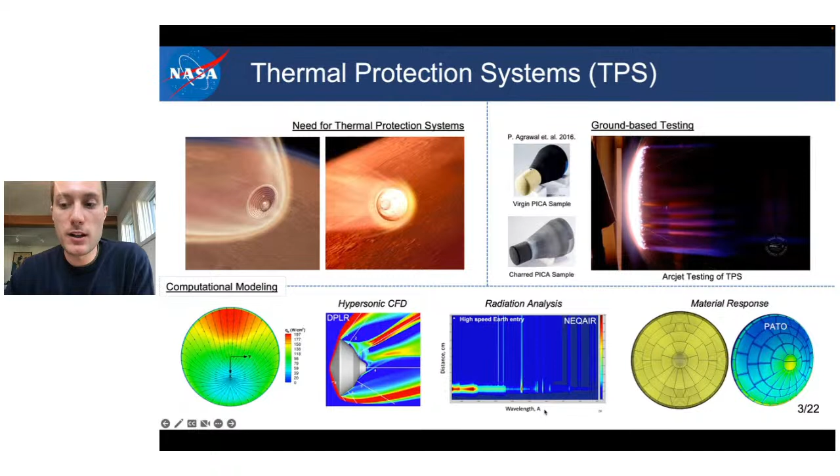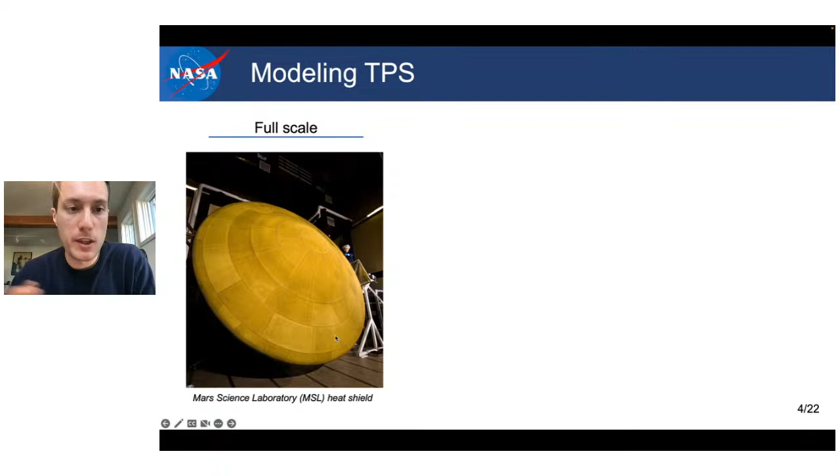So my group, specifically the PMM group, looks at this type of modeling, and we tackle it by employing a multi-scale approach. We have software that can mimic the response at the full scale of the heat shield, with meshes and models that mimic the whole surface of these big heat shields, which can be meters in size. However, in order to capture all the complex physics that happens in depth in these materials, we need to look also at the microscale side of this modeling effort, because we need to compute the material properties at the microscale in order to feed them back into the full-scale models.

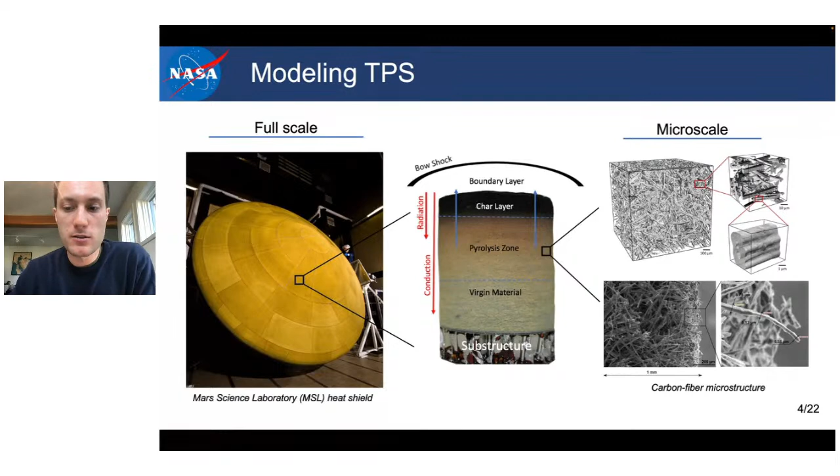There have been a lot of software that can do the full scale and material response sides, including some of the NASA tools like PATO, Fiat, Char, Icarus. However, Puma, which is the software I've been working on, is unique in the sense that it's one of the only ones that really looks into the microscale and computes and characterizes the properties at this scale.

And the materials that we deal with at NASA for the heat shields, as TPS, some examples are shown in this slide. They're mostly made of carbon fibers, and they're usually also infused with a phenolic phase. Phenolic is basically a resin that as it pyrolyzes, it absorbs a lot of energy, which helps the surface of the heat shield never reach the very, very high temperatures.

But there are multiple different architectures that these fibers can be arranged with. One of the most typical is called PICA, or phenolic impregnated carbon ablator, shown in the middle, which is basically just randomly oriented fibers. However, more recently, NASA has been investigating arranging these fibers into woven or weave components, by weaving them together like a yarn, as if it was a fabric. You can actually tailor the material properties to be more performing in a specific direction or in a specific environment.

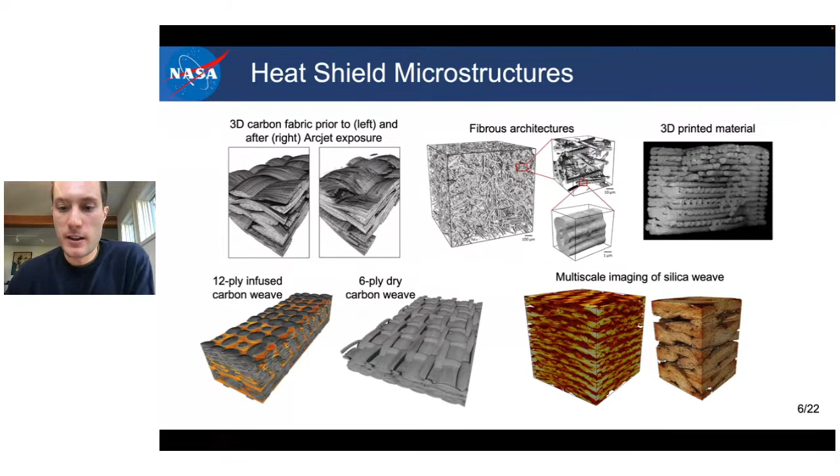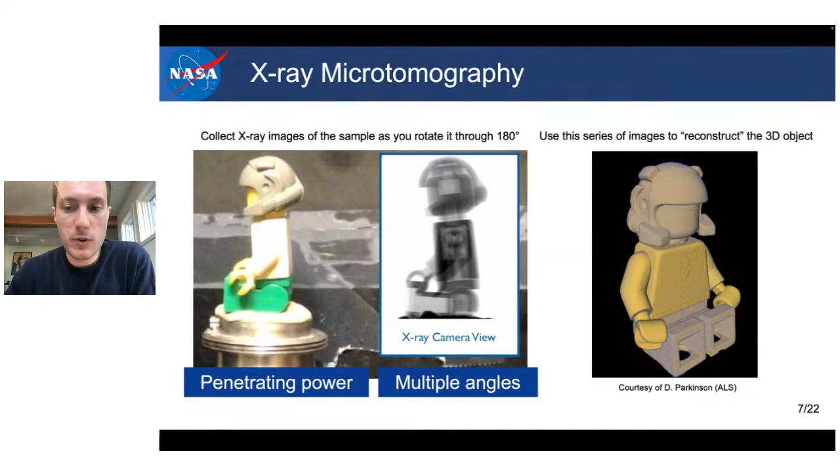So jumping into how do we get these microstructures into a computer, virtually, digitally. We use a technique called X-ray microtomography, which scans a sample, subjects it to very high intensity X-ray, and then you take scans at multiple angles. There are techniques called tomographic reconstructions, which enable you to obtain a 3D reconstruction of your model, including the internal structure, as you can see for this Lego man.

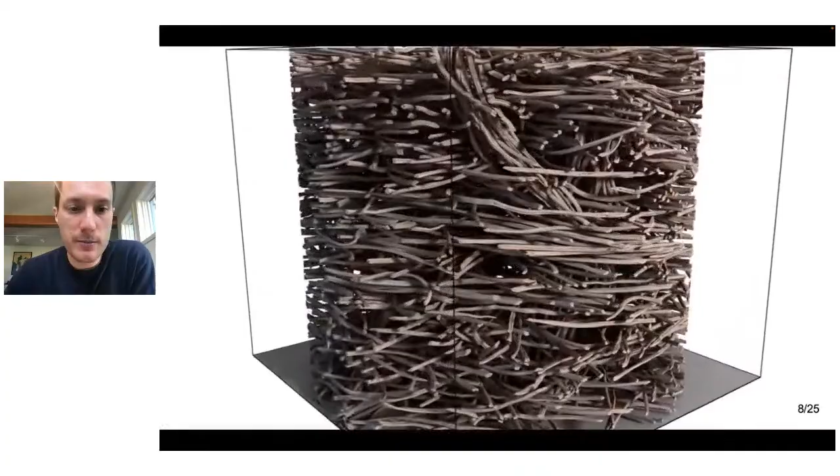So how does an X-ray microtomography of a TPS look? It looks as shown in this case, where you can see all the way down to the micron scale. Just to give you a sense, the diameter of one of these fibers is around 8 to 10 microns, and you can even see down to the hollowed out holes inside the fibers. So this is actually a sub-micron tomographic reconstruction.

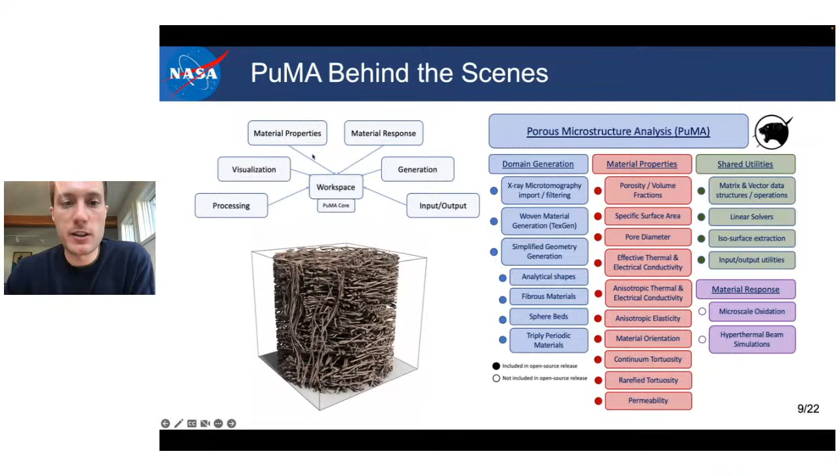So what Puma does behind the scenes, how Puma operates, is it leverages a class called the workspace, which is at the core of every operation that happens on these tomographic samples. This workspace class holds the 3D geometry, and then there are multiple classes that we've implemented as we were building the software to process the 3D domain, which is made of voxels, or 3D pixels. We've also recently added a lot of visualization capabilities to the software, but really the core and most important part of the software lies in the material properties and material response computation.

As I mentioned earlier, a few months ago we open sourced the software, and we've made it as user-friendly as possible. It can currently be installed using just a single line command, conda install Puma. We've also added a lot of documentation and tutorials for new users, and this has boosted our audience, and anyone joining today, I encourage them to try it themselves.

Just to give an overview of how the software is arranged, Puma used to be implemented only in C++ years ago, and that heritage part is still present in the current release.

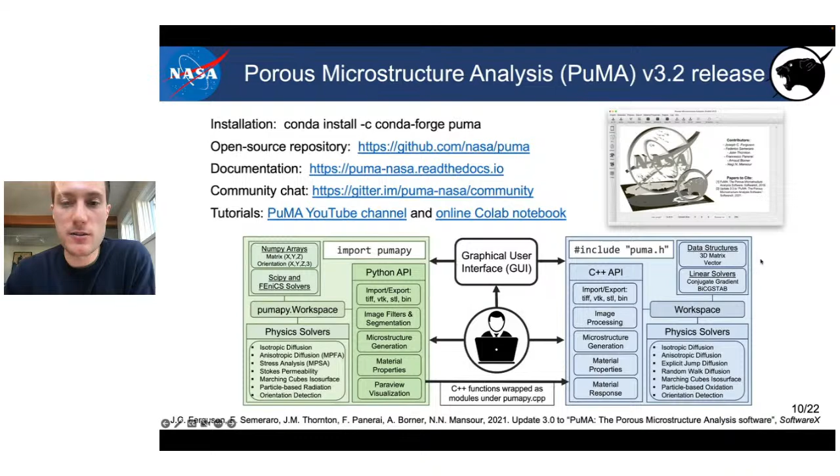More recently we've implemented a Python package, which also calls some of the C++ routines, and we call this package PumaPy. And for whoever doesn't want to write lines of code, you can use the GUI, or graphical user interface, shown here on the top right, which still gives access to a lot of the software's capabilities.

To show a few other snapshots of the GUI, here we are importing a 3D weave from an actual real sample from tomography, showing a 3D visualization, and finally doing some post-processing including the weave segmentation of the tows, as well as detection of the orientation of the tows.

More recently, Puma has also been packaged up as a plugin for a software called Dragonfly, which gives us even more visibility into the material science field.

Finally, I wanted to mention that we've recently been awarded NASA Software of the Year. I received the news just a couple of months ago, so we're really honored to have been awarded this prize for our efforts.

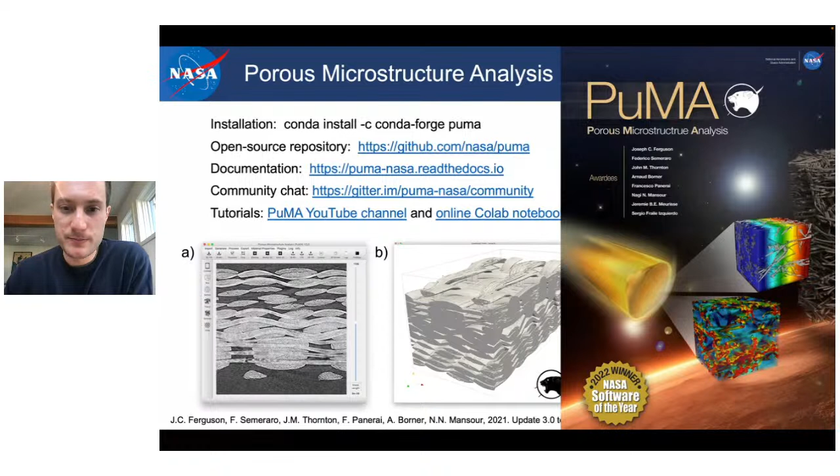From now on, I'll jump into more of the capabilities of the software. A big component are the particle methods implemented in Puma. What these particle methods do is basically a Monte Carlo type of approach, where you scatter particles throughout your domain and compute different properties and do different things.

One of the things the particle method allows you to do is mimic oxidation. Here I'm showing side by side a sample of fiber form, which is basically just the fiber phase of PICA. On the right-hand side is a 4D tomography, meaning we actually have a data set of a 3D model changing in time.

On the left is a similar domain in Puma, and we can mimic the same type of oxidation of the surface by tweaking the sticking probability of particles hitting the surface of the model. Again, on the left is a Puma simulation, and on the right is an actual real domain oxidizing on the surface. We can also compute the radiative conductivity.

The radiative conductivity is very important for high temperatures. We do this by scattering a whole bunch of particles from different spots, then tracking how far these particles travel until they hit the solid surface. You can then do statistics on how far a particle is likely to travel, and from that estimate compute what's called the extinction coefficient, which gives you the radiative conductivity.

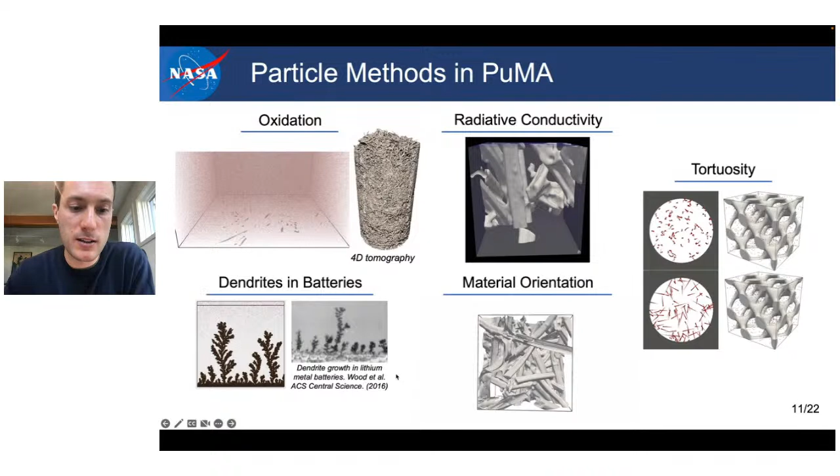The software has grown a lot in capabilities, and we've recently added a module to generate artificial microstructures. These are some examples of the microstructures we can create — we can scatter spheres throughout the domain, create periodic foams, as well as fiber structures, which are of course more relevant to NASA.

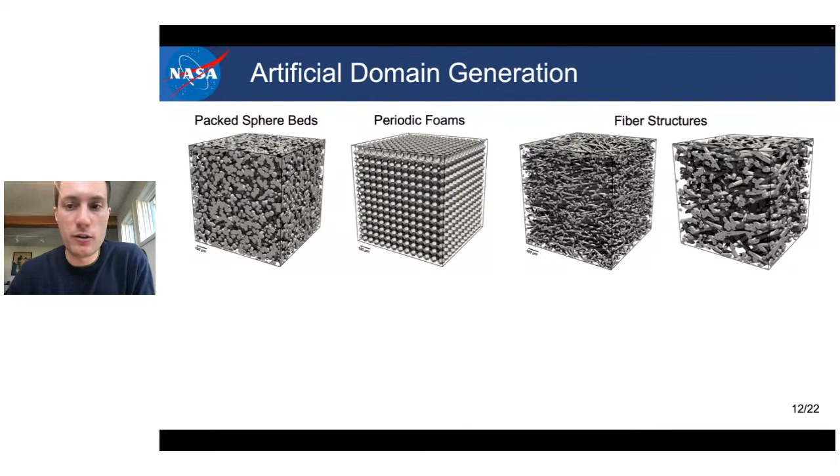For more of a combustion type of research, it's really interesting to look at triply periodic minimal surface type microstructures. And finally, of even more interest to NASA are the woven geometries — we also added a capability of generating an artificial weave from a woven diagram.

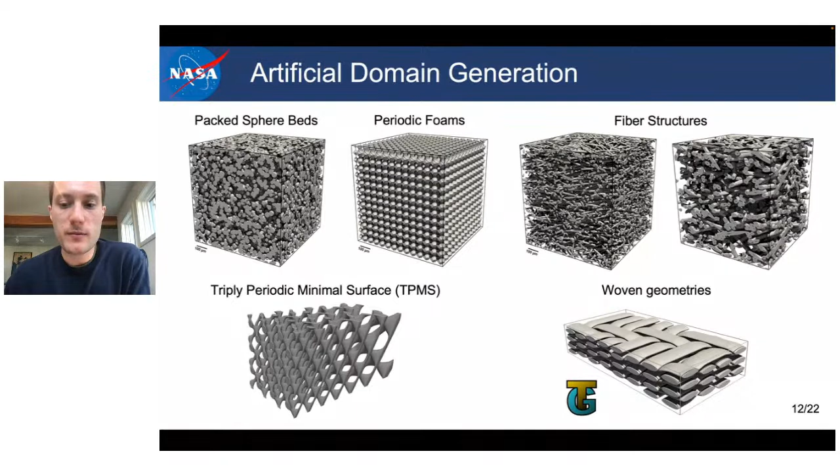From here on, I'll jump into the capabilities, the property computation side that I've implemented. But I wanted to add this slide to introduce the topic of anisotropy, and this anisotropy being carried out at multiple scales.

This can be explained by looking at a real tomography weave, shown here. As you can see, the tows have a very directional pattern. This directional pattern influences, of course, the properties, meaning that the properties in the warp direction are different than the weft direction and through thickness.

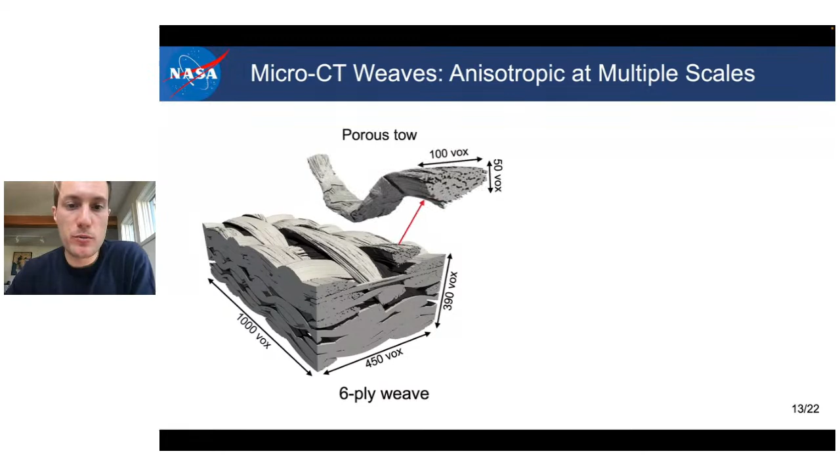If we zoom into a subsample tow, we can see that there is porosity going throughout the tows, and this porosity also varies inside the tow, which also affects the local properties and the anisotropy of these materials.

Actually, through research of ours, we've recently discovered that we can track this anisotropy all the way down to the fiber level, and these fibers are basically made of cylindrical graphene sheets, so along the fibers there will be a lot higher conductivity, for example, than across it.

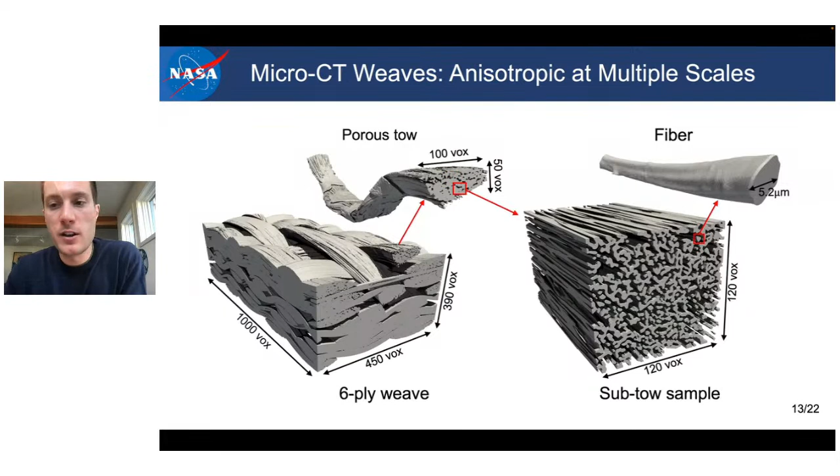We researched this behavior, and we could see that it matched experiments we could make, only by imposing this different fiber conductivity.

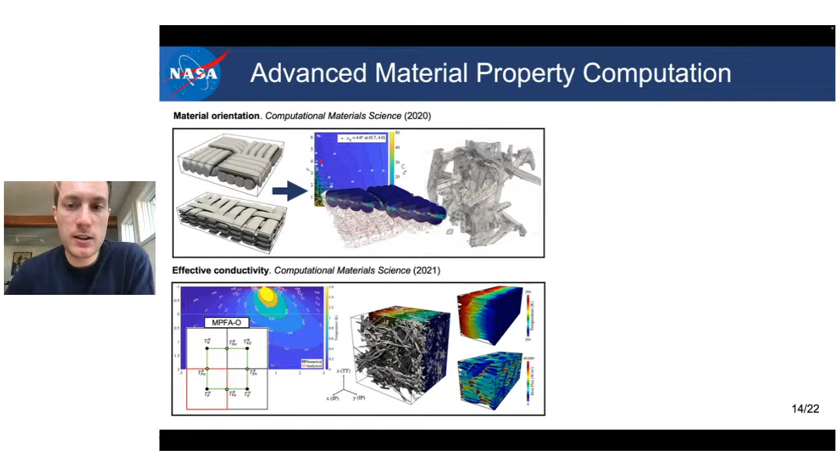At a high level, the next few slides are about material orientation, which is critical for considering this anisotropy inside the materials. Then I'll introduce the conductivity numerical method that allowed us to compute the conductivity, including considering anisotropic phases. Similarly, here are some snapshots of the verification campaign that we did for the elasticity.

The elasticity actually uses a very similar numerical method, but generalized to vectors instead of scalars for temperatures. So we extended temperatures to displacements.

Finally, through the collaboration with UFF, we have added the effective permeability to PUMA. We use a different numerical method for this, based on finite elements instead of finite volume, but we still optimized it as much as we could for these voxel meshes that we're getting from tomography.

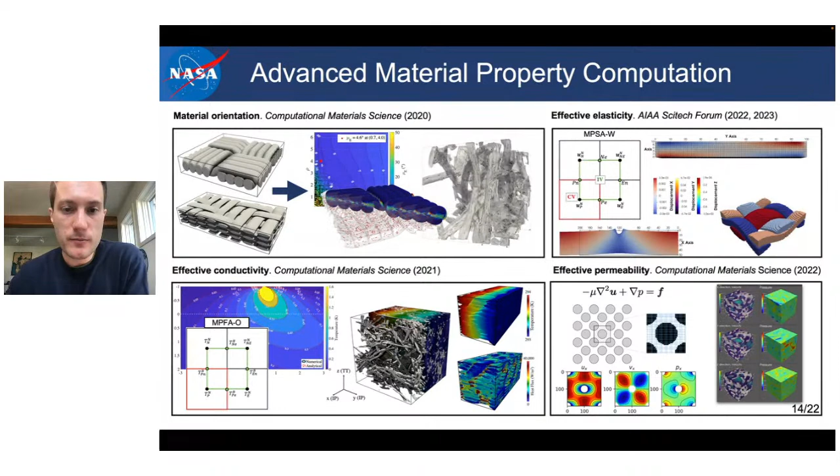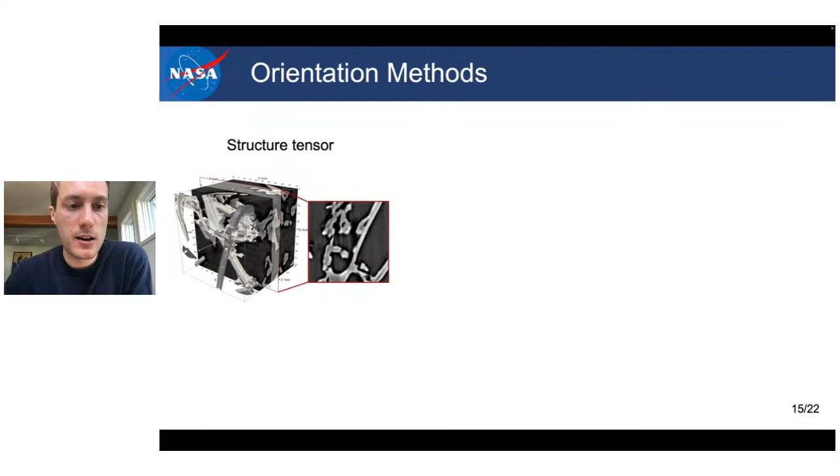Starting from the orientation methods, there are 3 different functions that we've implemented. The first one is what we call the structure tensor, based on an image processing technique called the structure tensor, which looks directly at the grayscale values of your tomographic domains.

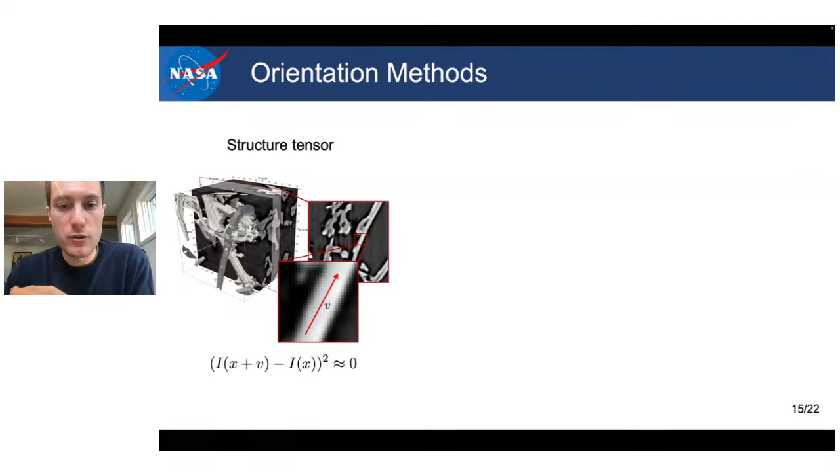It picks out, by applying different Gaussian blurs and derivative of Gaussian filters, and doing an eigenvalue analysis on these filters, the direction along which the gradient of these grayscales changes the least. This turns out to be a very good estimate of the local orientation of our fibers.

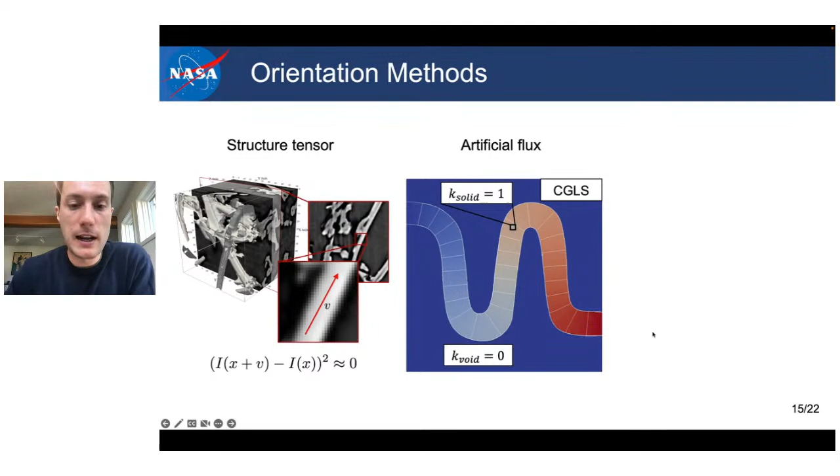Similarly, we also implement an orientation method using the conductivity solver, basically by imposing an artificial conductivity of 0 to the void phase and of 1 to the solid phase. We run conductivity simulations in a specific direction, and the heat fluxes that are generated, shown at the end of the simulation after the solver has converged, are going to be roughly aligned with the local orientation of the material as well.

And then finally, this is the raycasting, which uses the particle method that I mentioned earlier, where you track the longest traveling particle and pick that to be your local approximate orientation.

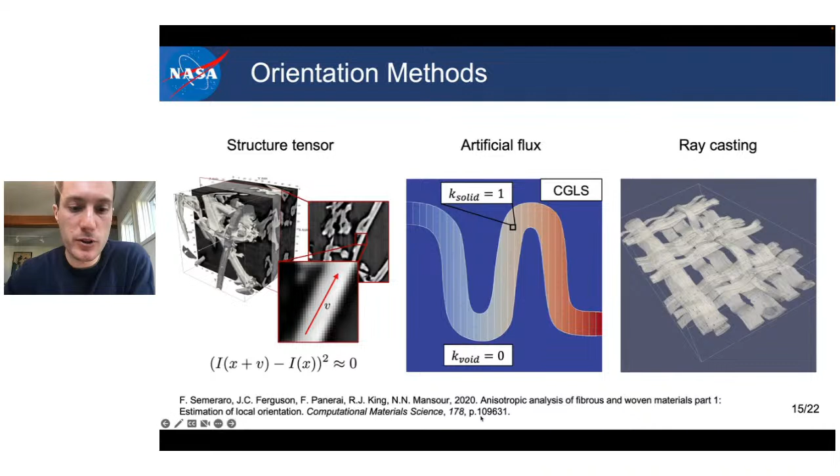We've wrapped up this work into a part 1 paper to Computational Materials Science. The part 2 was about the conductivity, which uses the local orientation of these phases.

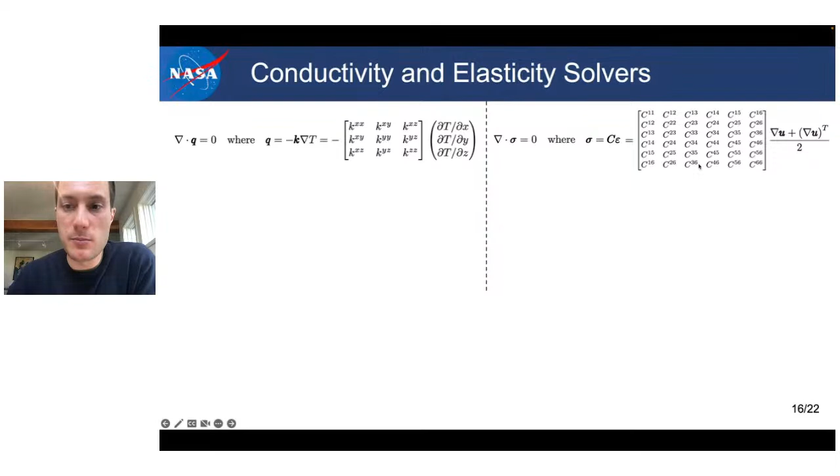What we are using for the local discretization of our finite volume scheme is called the multi-point flux approximation, or MPFA, a commonly used numerical method. This linearly approximates the fluxes to the local nodal temperatures through a transmissibility matrix. On the right-hand side is the multi-point stress approximation, which does the same between stresses and nodal displacements through a transmissibility matrix.

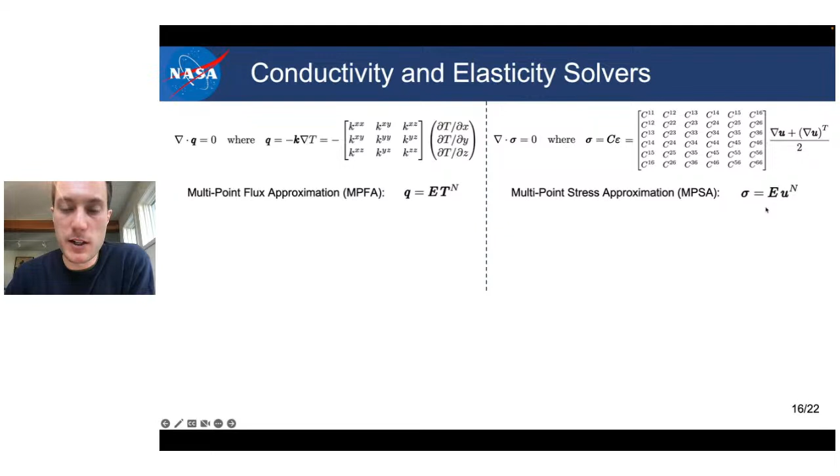We're introducing gradients between these nodal values for displacements and temperatures. At a high level, we're solving a boundary value problem where we impose a temperature gradient for the conductivity by holding two surfaces of a domain at different temperatures. In this case, I have a cylinder, which could represent a fiber.

By holding these two surfaces at different temperatures, you create a temperature gradient. Similarly for elasticity, we hold a displacement, imposing a unit displacement in the three Cartesian directions. For elasticity, we also have to include shear cases in order to get back the full 6x6 tensor.

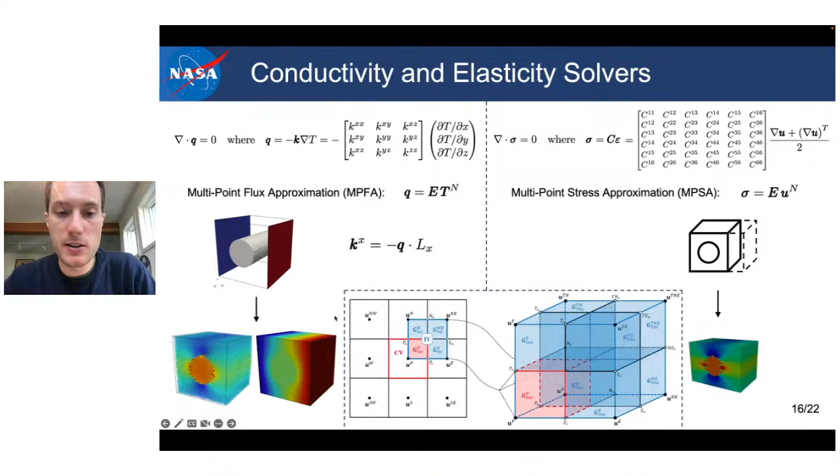We use these converged fluxes and displacements to compute back and average out the effective property: conductivity on the left and elasticity on the right. This gives us back just one column of our tensor.

If we repeat this, imposing boundary conditions in the three Cartesian directions, we get the other three columns for X, Y, and Z. For elasticity, we also have to impose boundary conditions for the shear cases, which are computed slightly differently, but using basically the same approach to get the fourth column of your 6x6 tensor.

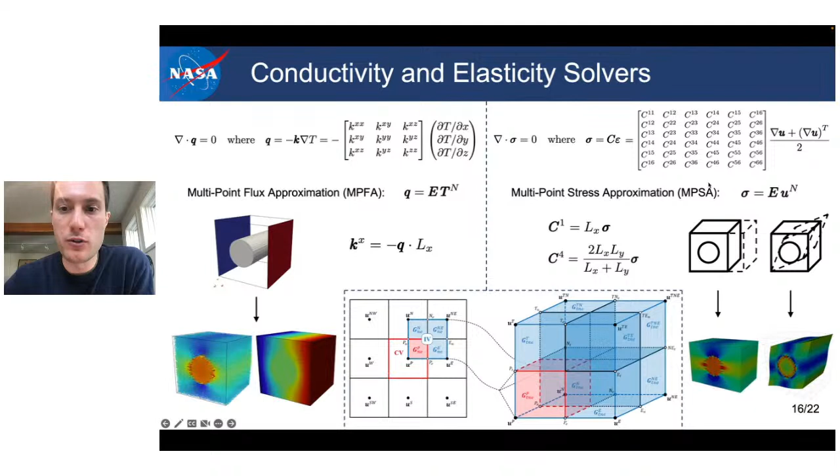So the validation of these solvers was performed on different woven domains. These are different candidates for a project called ADEPT, which is a deployable type of heat shield design.

These are the weaves, the TPS weaves that were some of the candidates, and these are real tomographic reconstructions of them. As you can see, they're already segmented by assigning a single ID to each one of the tows of your weave.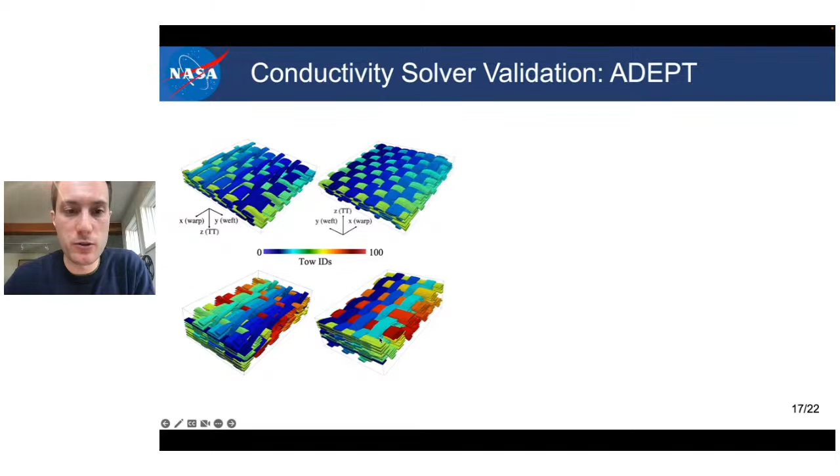What we did is, if you have a periodic domain, you want to crop out what's called a unit cell, which is the smallest part of your domain that repeats itself. Once you have that unit cell, you can compute the conductivity or elasticity in the three Cartesian components by imposing the boundary conditions mentioned earlier.

These are some of the temperature and flux fields that we got out of imposing a simulation in the y direction, for example.

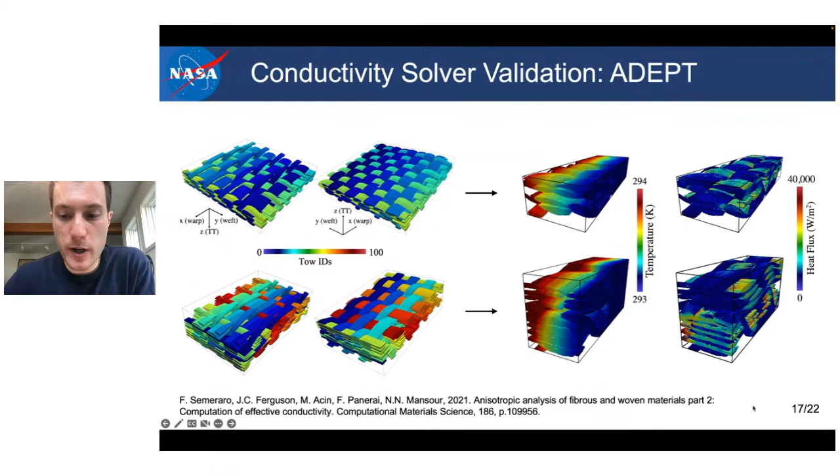If you want to learn more about the whole validation campaign on this numerical conductivity solver, we also have a part 2 to the Computational Materials Science journal.

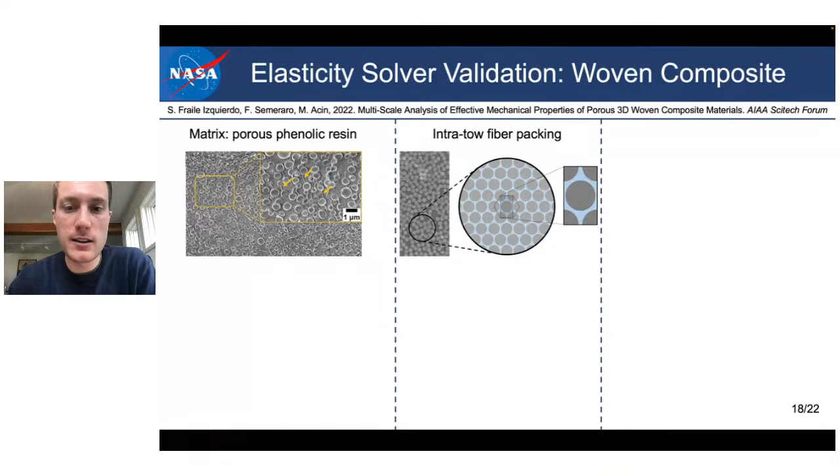On the elasticity solver, we decided to take a different route, analyzing a woven composite at different scales, each artificially generated. For example, this is of relevance to NASA: we have the porous phenolic resin that infuses the weave, and at the scale up we considered the fiber packing, the interaction between this phenolic resin and the carbon fibers. Finally, we used these properties in an actual woven unit cell of the tows and the phenolic phase for the void space.

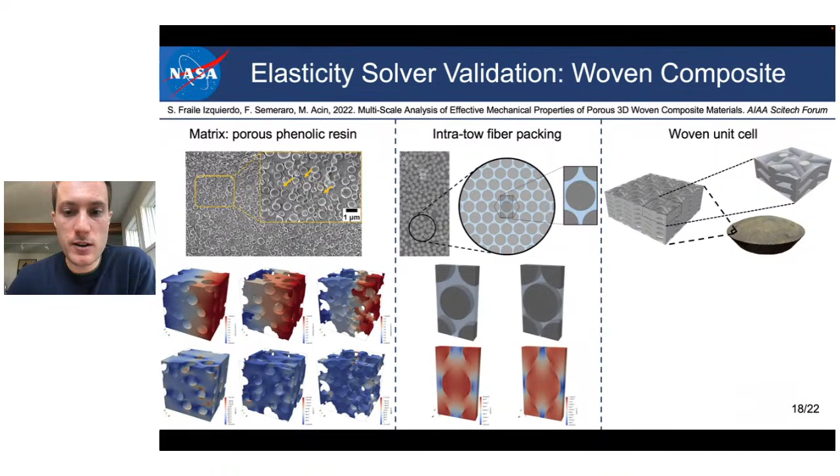We also did parametric studies on the porosity of this phenolic resin and how the elasticity varies according to this porosity, as well as how it varies according to the fiber packing. Finally, these are the results of an artificially generated unit cell using the properties we computed at the matrix scale and the fiber packing.

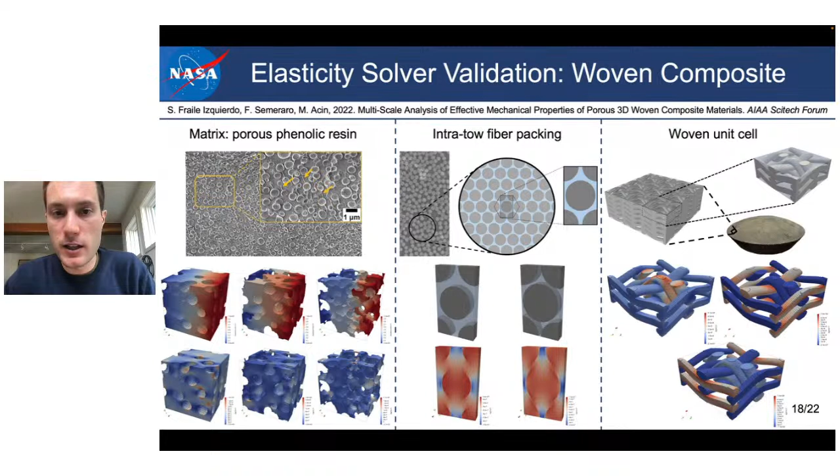The last solver I'm going to talk about is the permeability solver, which was actually added last chronologically. This permeability solver solves Stokes flow, valid at very low Reynolds numbers. We use a finite element scheme based on a Q1 discretization, meaning we use first order elements in both velocity and pressure. The governing equations can be written out like this for Stokes flow.

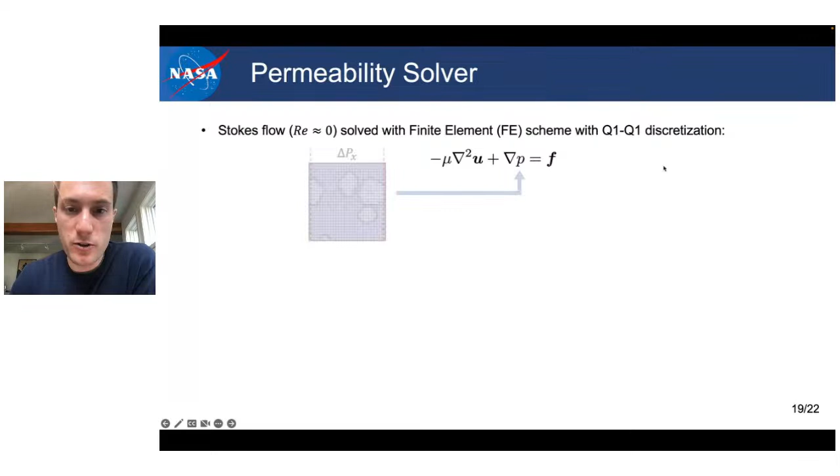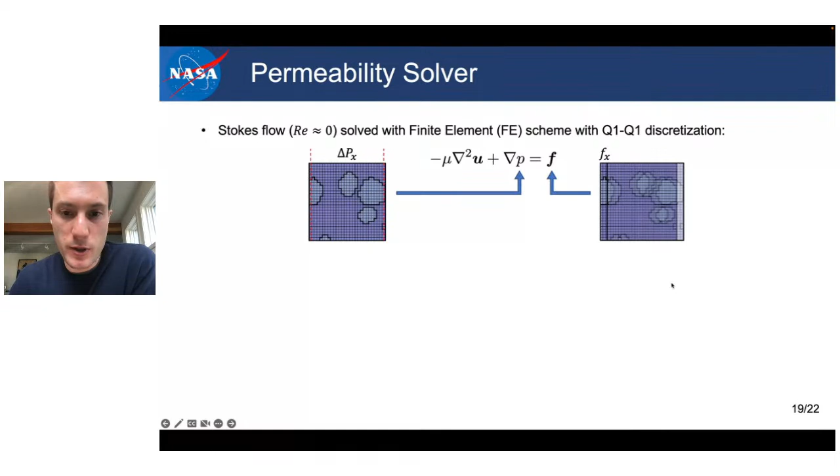There are different approaches for imposing boundary conditions: you can either impose a pressure gradient or impose a body force. The latter is more benign towards periodic boundary conditions that you can apply. This is what we implemented, again in collaboration with UFF. We've recently submitted a paper to Computational Materials Science on this numerical solver, as well as the validation campaign. This was implemented through an NVIDIA kernel.

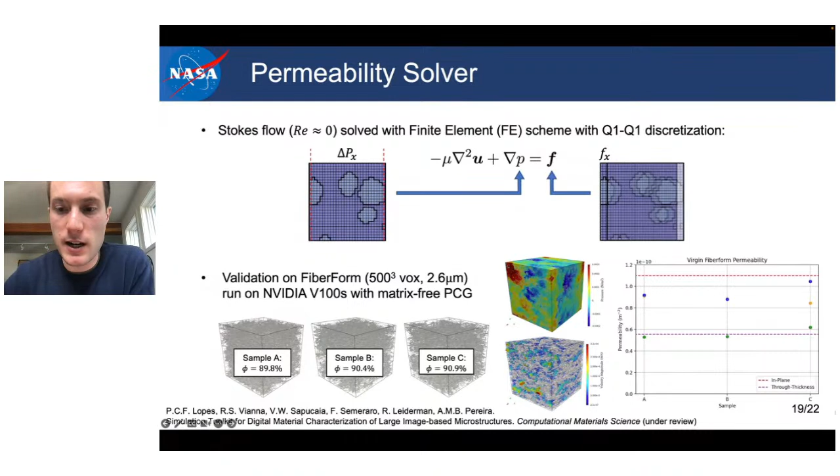The results on FiberForm look as follows, where the horizontal values are the in-plane and through thickness. Fiber form actually has a preferential alignment of the fibers, which is why we call them in-plane direction and through thickness, different because of this alignment. We can see that the numerical values we obtained actually align with the trend of these through thickness and in-plane components pretty well.

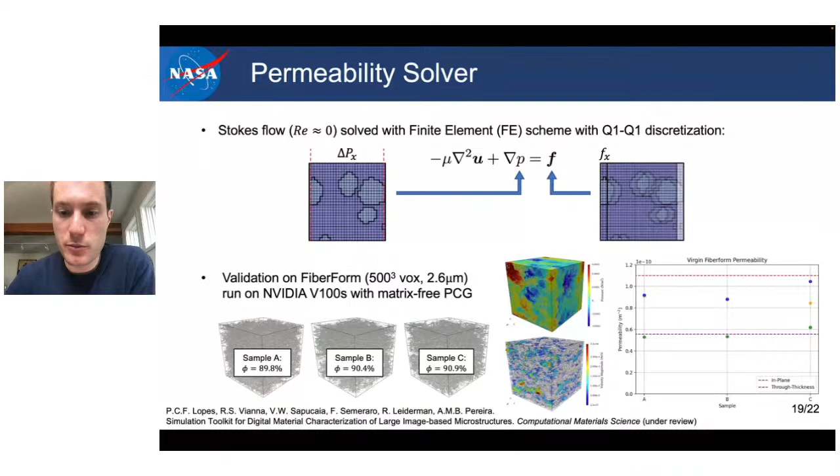This is the last study I'm going to discuss, about the 4D tomography I briefly showed earlier. This effort is about tracking the oxidation of FiberForm in real time for a real domain, which can only be done using a very high frequency tomography scanner, actually at the Swiss Light Source in Switzerland.

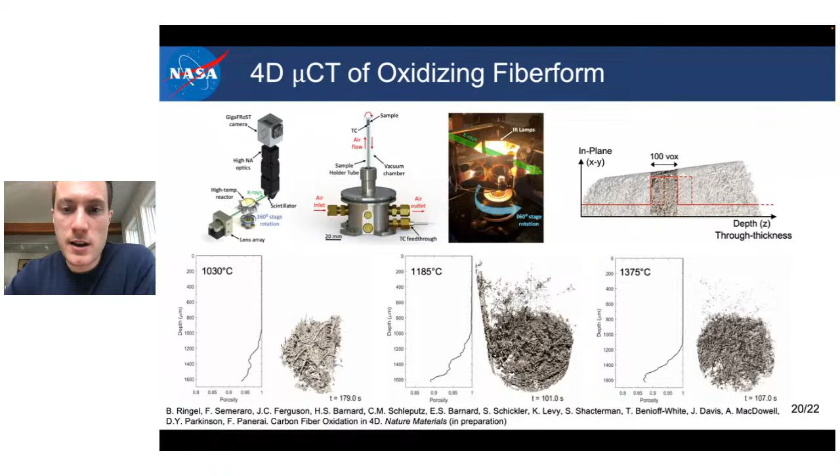And until you do this process throughout the thickness, and then also throughout time, these are the results, which I obtained very recently. We ran this study for conductivity, permeability, and tortuosity.

We also ran a similar study for the fiber orientation, where we keep computing the fiber orientation throughout time, and we can track how the fiber elevation changes as the material oxidizes. You can see clearly that there is a correlation between the material properties and the fiber orientation that is changing.

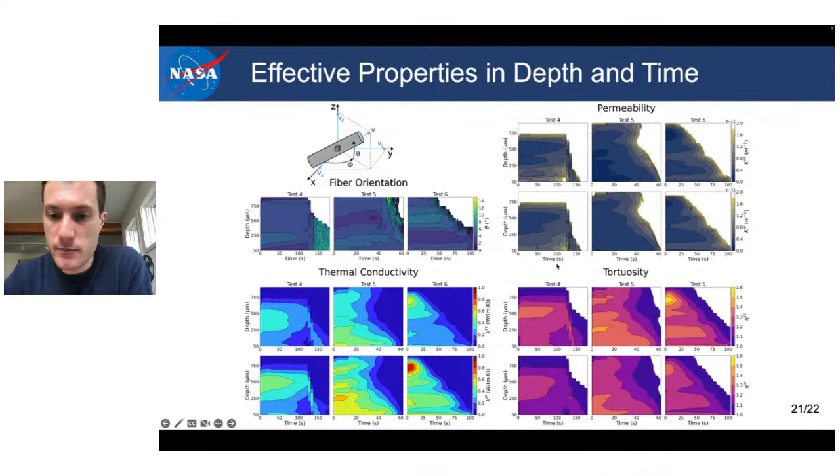There's a lot to talk about on these graphs, but I want to wrap it up here. Thank you very much for listening, and I'm happy to answer any questions that you might have.